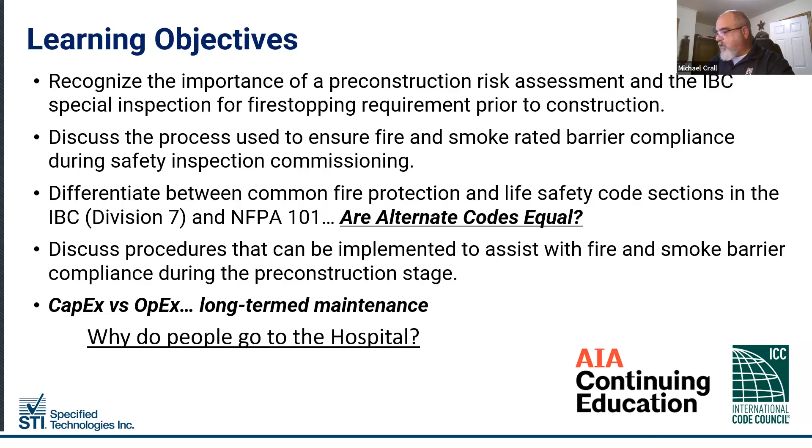So I always start off my presentation with this video. It's a quick video. Here we'll see a staged fire. What I'll ask is please pay attention to the right arm of the chair, the seat cushion, and then the lampshade. So we'll notice it's a dried Christmas tree, to be fair. Watch as that tree is engulfed in flames.

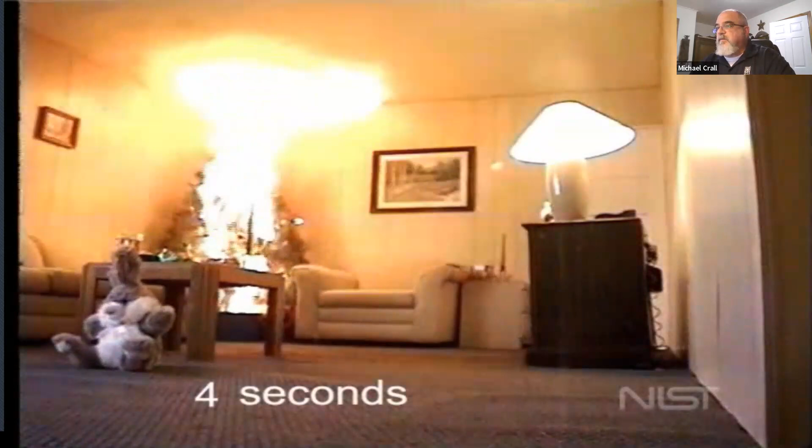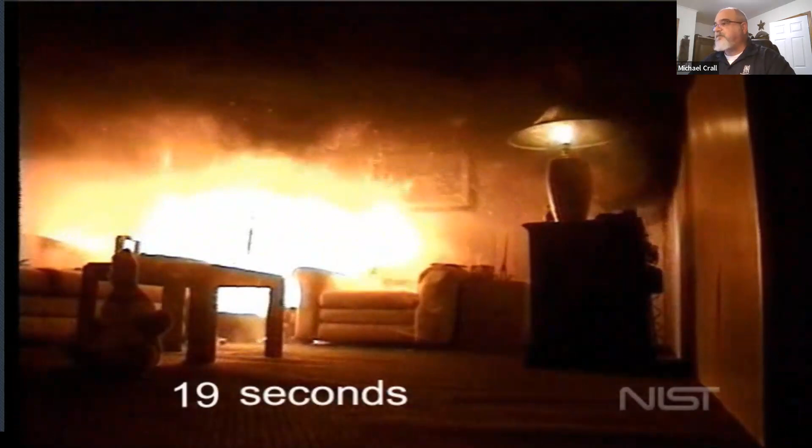We'll start to see the thermal properties broadcast within the room. Notice that right arm of the chair is starting to smoke. We call that off-gassing. Watch as that right arm ignites and then the seat cushion momentarily after. Note the color of the smoke. Now, looking at the lampshade, why is that lampshade melting? So we see the convection within the room.

If maybe when you were a child, you were told to be at the floor line in a fire event, we used to have 17, maybe 18 minutes to vacate our own home in a fire event. Those statistics were updated to 3 to 4 minutes. I attended the NFPA conference earlier this year. That 3 to 4 minutes has now been reduced to 2 minutes. So we're going to come back to that.

So smoke can travel upwards of 420 feet per minute, given the fire load or the fire conditions, if you will. And approximately 57% of people who perish in a fire are not in the room of the fire's origin. So again, most people perish in a fire due to smoke.

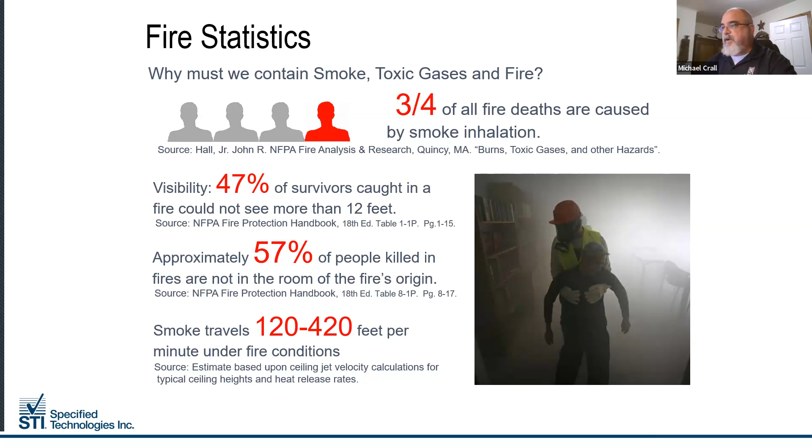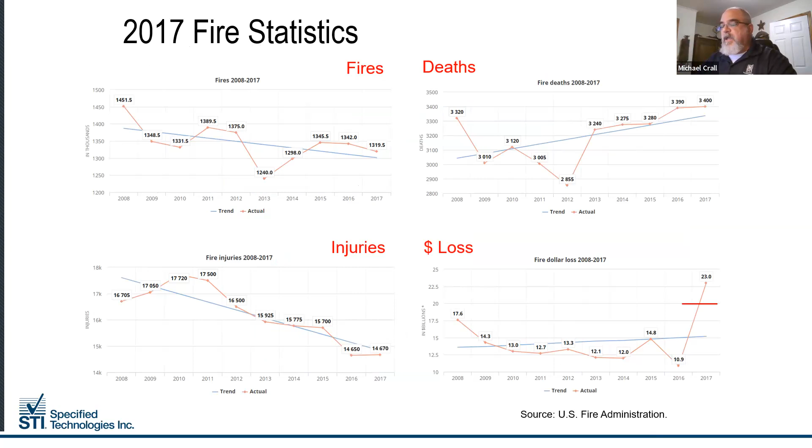Fast forward about 10 years, we see a decline in fire events and a decline in injuries. However, we have an uptick in fatalities and property loss. That red line in the property loss, anything north of that is wildfire. So I pulled that data out. So remember these statistics in that video we just watched as we go through the presentation and we talk about the 2 minutes that we have today.

If we take a step back into time and we look at the early years, if you will, what we'll call the definition years, Firestop was previously listed as a product listing. So think of it as a silo versus what we have today being system listings. So we have an incorporation of a lot more standards that we have.

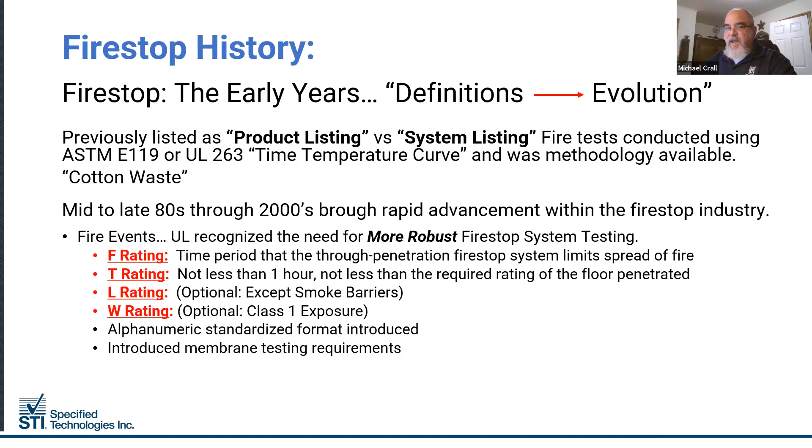Mid to late 80s through 2000s brought rapid advancement within the Firestop industry. UL recognized the need for more robust Firestop system testing. So we see the development of the different construction materials. You see the 4 different ratings there that we're going to come back to. These are part of the ratings that we have in our industry, as well as specific standards of how those assemblies will be tested.

So now we enter into the evolution years. So the mid to late 80s and early 90s, we continue that rapid advancement within the Firestop industry. We see the incorporation of collars, so we have combustible pipes. We also look at inclusion of accelerated aging requirements, which is noted within UL 1479. We also identified the alphanumeric standardized format, which was introduced in 1992. The L ratings were identified in 1993, which is inclusive to UL 1479.

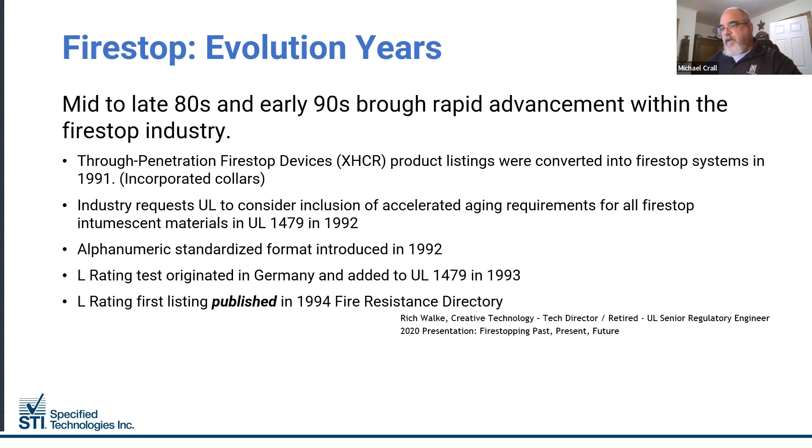First listing published in 1994. W ratings for water. And let me go back a second, please. L ratings, leakage, air leakage. So we look at leakage from one side of the, let's say, gypsum wall to the other side, or possibly a floor condition, as L ratings are tested within smoke barriers. Smoke barriers are unique in that they have vertical and horizontal orientation.

The W rating is for water. So we have 3 classes of exposure. If you think of the marine industry, construction falls within class 1, which is a 3-foot high water column that sits around the assembly. So we're not allowing that water to pass through that horizontal condition for upwards of 72 hours. Once that assembly dries, then it goes into the next realm of testing. W rating first listing published in 2005.

You may be aware of the 3 legacy codes. They merged, became the IBC, the ICC as we know today. First publication in 2000.

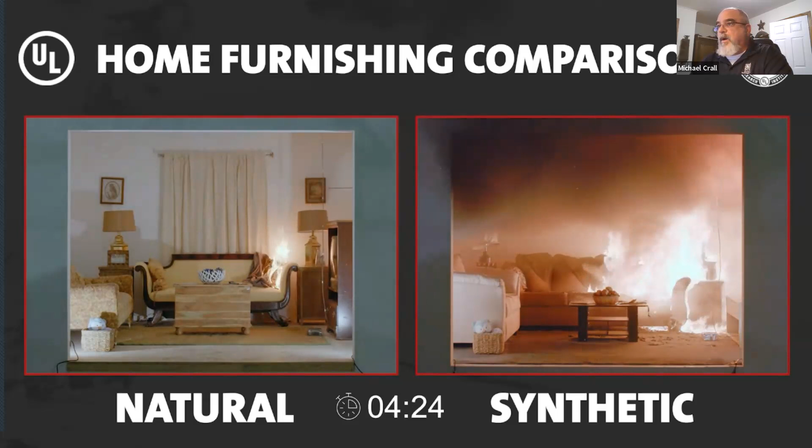So we see how the synthetic fibers in that video on the right, time to flash over less than 5 minutes. So we can see as we incorporate and bring different fibers into our construction and what those furnishings are, how that can actually add to a fire load. Notice the color of the smoke on the natural video side. So when we were told to be at that floor line, these were the conditions at that time when that 17, 18 minutes was recommended or identified.

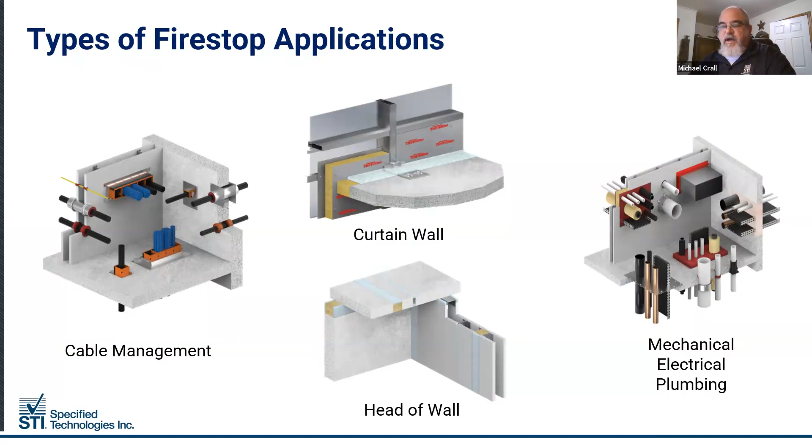So types of Firestop applications. We have different through penetrations, which would encapsulate cable management, mechanical, electrical, plumbing conditions. We also have various different joint conditions. And then edge of slab, curtain wall, but they all fall within the perimeter containment family.

We can find overfilled sleeve conditions. The reason there's no tested system is because there needs to be enough annular space or void within that sleeve to allow for the fire stop material. We call that percent fill. Where we have too many cables, now we're not allowing for that addition of the fire stop that's required.

So typically we'll be in a 30 to 40% maximum percent fill. Some assemblies may allow 100%, but we're getting into devices that are completely designed devices that have intumescent incorporated into that device.

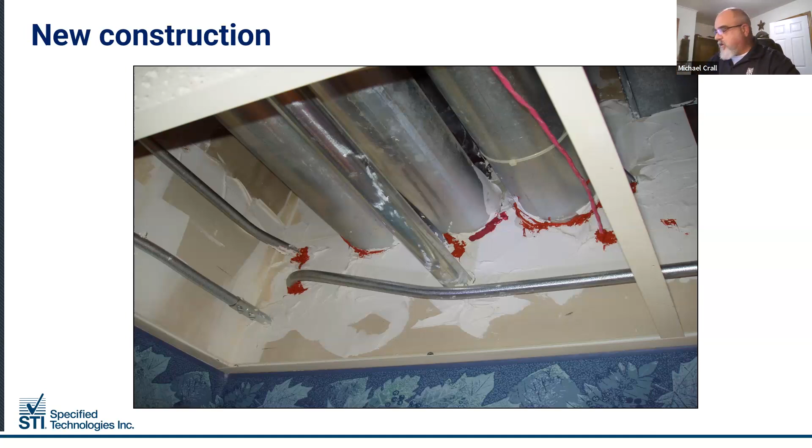So this is a picture of new construction. Again, going back to the CapEx versus OpEx, good people, but we think by just using drywall, tape, and mud, we're having a drywall repair and it's compliant and installing Firestop around it, but there is no base design that will allow for the addition of the tape and mud as we see in this particular photograph. So drywall mud is not Firestop.

Drywall, tape, and mud is very good for your butt seam joints, where the gypsum board assemblies come together. That's part of that tested assembly, but not using that mud and compound within the annular space, so that gap around that penetrating item. That will not pass not only the fire duration burn, but then also the hose stream test, which we have that video coming up.

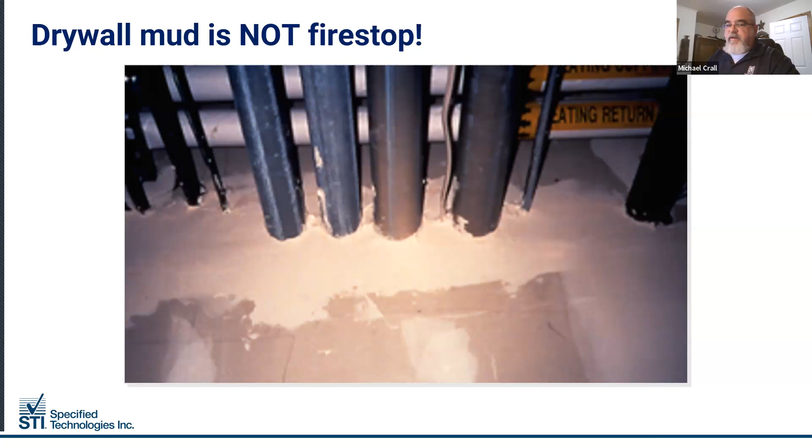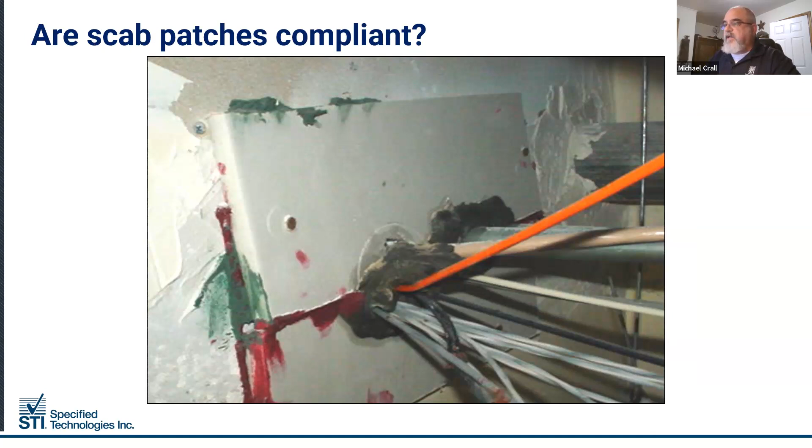Scab patches are not compliant. So we're taking drywall, putting it on a wall, and a couple random screws or maybe nails, and thinking we're using maybe the right materials, so we think we're compliant.

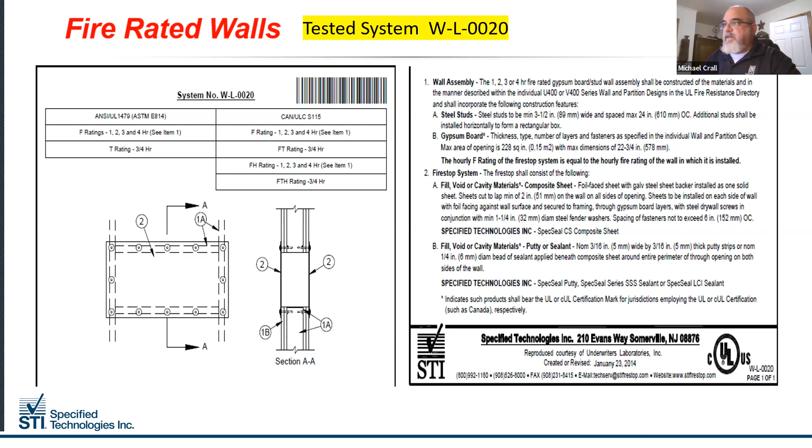In this case, WL0020, we're taking a gypsum wall, and what we're using is a composite sheet. Notice 1A in the illustration on the left, you have your vertical studs, and then you see the horizontal studs, which are also added. That's adding integrity to that system. You see the drywall screws and the fender washers. That's providing a better integrity for that composite sheet as it's secured to the wall. This is a tested system.

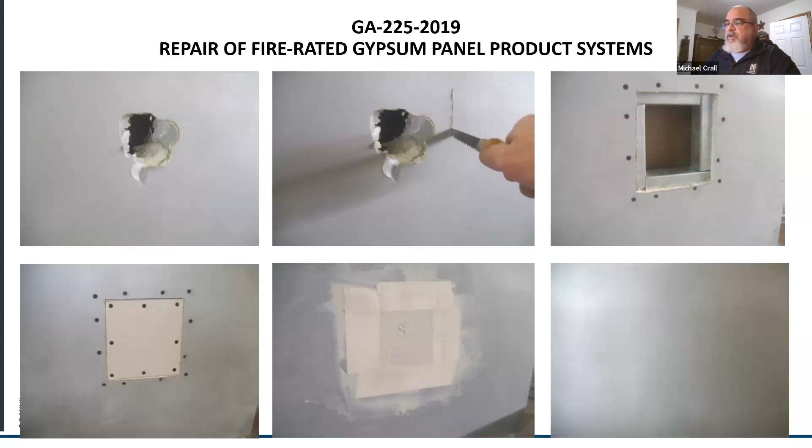Industry repair alternatives, we get into what we call the GA225, where we have a damaged drywall section in this instance. We cut that damaged area out. We add that framing. Notice the screws and the screw spacing, and then drywall tape and mud. There's no Firestop. This is not a tested system, but the intent is we're going back to the base design.

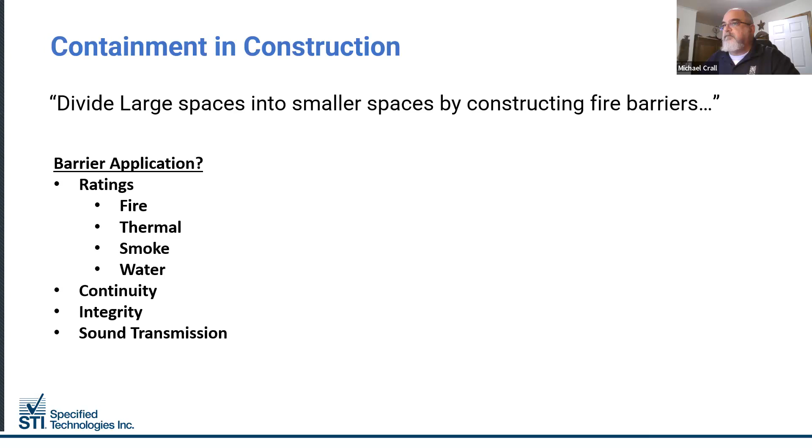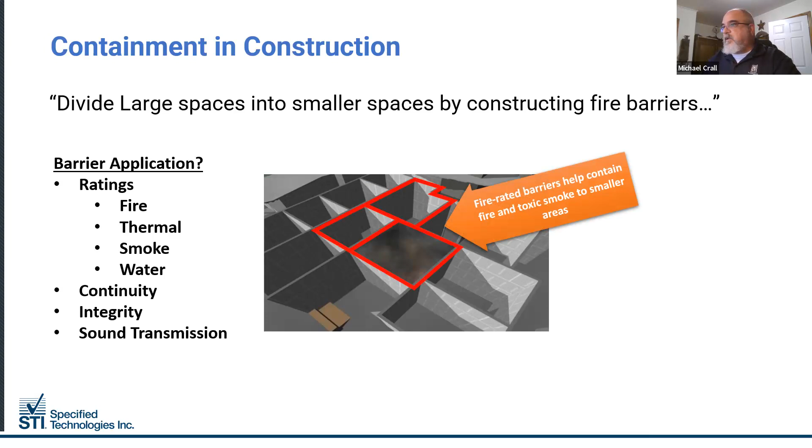So we look at the different codes and the alternative codes. And it's important to understand how they're identified. NFPA 101, for example, does not identify firewall because it's life safety oriented, not construction; IBC is where we would find the firewall. So you see a couple stars here. So my fire resistance rating of that barrier and then the door assembly.

If you've ever questioned why we may have a 1-hour fire resistance rated wall and a 45-minute door, that's because there's not intended to be a direct fire load in front of the door. So that's why we'll have 45 minutes, whereas the upper star, we may have a cabinet or a couch or some sort of furnishing that would be in direct contact or close to that wall that could potentially flash.

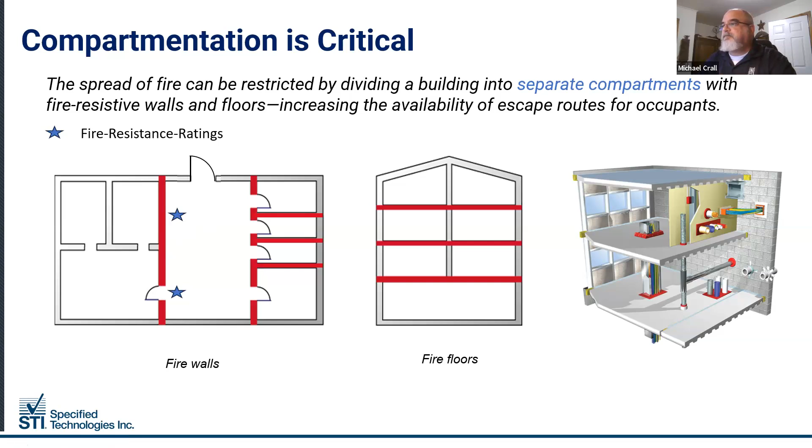Comparing the life safety and construction documents: on the left-hand side, viewing through IBC, on the right-hand side, NFPA 101. Labeling, where we're actually labeling the firestop applications, is not a code requirement. It's identified within FM 4991 as a best practice.

Whereas marking and identification, or what the industry will call stenciling, was first introduced in IBC in 2009, maintaining a 30-foot spacing. 2012 was updated to maintain that 30-foot spacing, but within 15 feet of an end cap or that termination. So I don't have to rip up 30 feet of tile to find my first stenciling point. NFPA 101 also does not recognize marking and identification.

So I've been in the construction industry for 30 years. I worked for 2 different manufacturers, firestop manufacturers. In between that time, I did code consultant surveys and inspections, and a lot of them in healthcare facilities.

So it's very important to note when we look at the construction documents in accordance with IBC versus the NFPA 101, which are life safety oriented, but we still have to maintain those barriers, the doors, whatever those assemblies are within the building code, we cannot downgrade them.

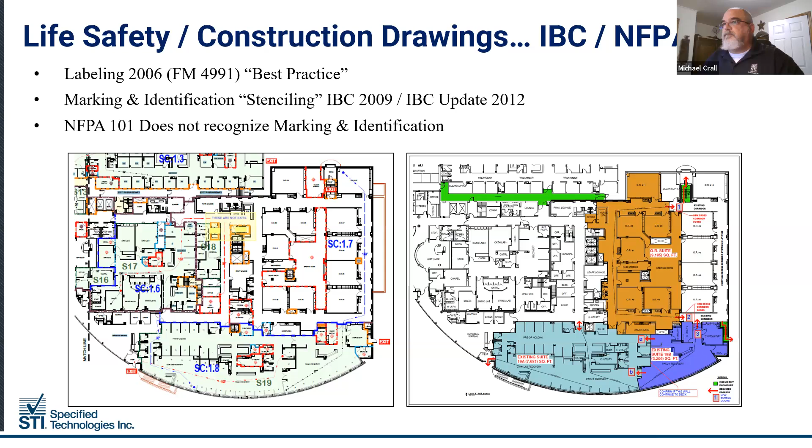So what to consider in the design? So again, we have the three different sections: through penetration, joints, and then perimeter fire stopping, as well as additional divisions where we're going to specifically call out those fire stop applications with reference to industry standards and testing.

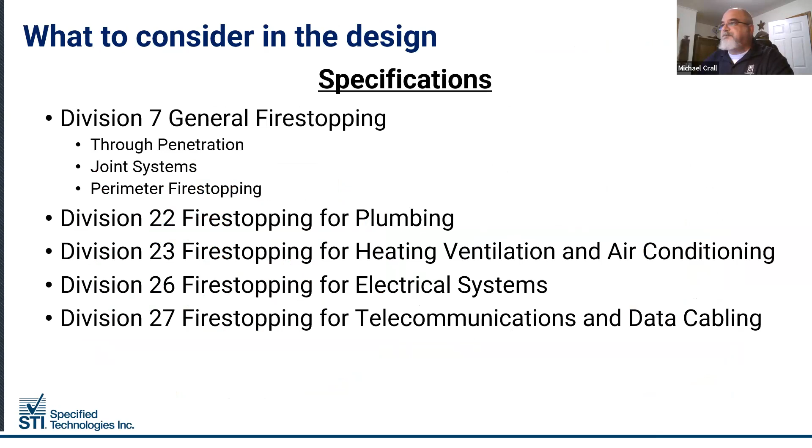Where requested, there's also the ability to include CAD detail sheets. If we're able to obtain a blank title block sheet, then we can compile the tested systems, or submittal, if you will, for that project, and then incorporate the CAD detail sheets as part of a barrier management program. You're starting to outline what those conditions are, how the barriers are identified, and then where the fire stop applications are noted.

So we talked about different penetrations. So through penetrations go completely through, say, a gypsum wall. Where we have membrane penetrations, we're only going through one side. So think of outlets, switches, maybe thermostat housings. And then we have high traffic openings for cables, and how we have to identify each one of those conditions and tested assemblies to reinstate that integrity.

Various different construction joints: head of wall, wall to wall, floor to floor. Bottom of wall is not identified directly in the body and language of the code, but there are STC requirements. We also know that we have the continuity as that barrier is identified within that code, where that barrier shall start at the floor, not a half of an inch up.

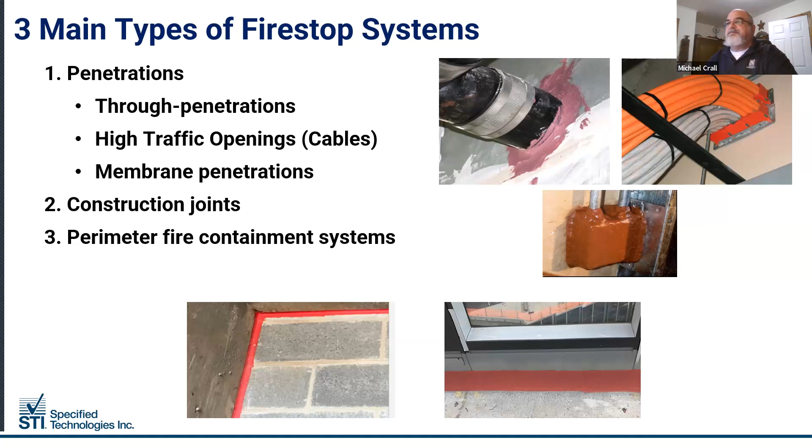If we compare smoke barriers to smoke partitions, smoke barriers, it's a scientific test. We're testing the L ratings. It's a two-stage test. So we're resisting movement of smoke. Smoke barriers are minimum 1 hour fire resistance rated, and again, can be vertical or horizontal in nature. Smoke partitions, however, are non-fire resistance rated, where we're limiting movement of smoke with an approved material.

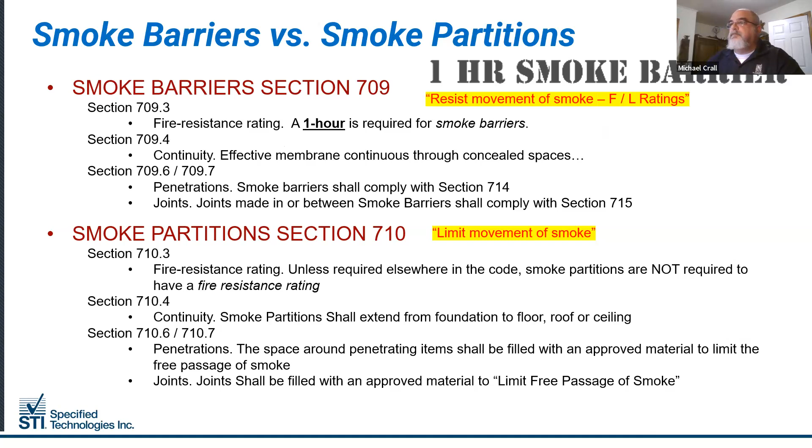If we compare smoke barriers within IBC and NFPA 101, we notice the consistency of the 1 hour fire resistance rating and movement of smoke. However, when we look at existing healthcare, we see Chapter 19. Any required smoke barrier shall be constructed in accordance with Section 8.5 and shall have a minimum half hour fire resistance rating. So why half of an hour versus an hour?

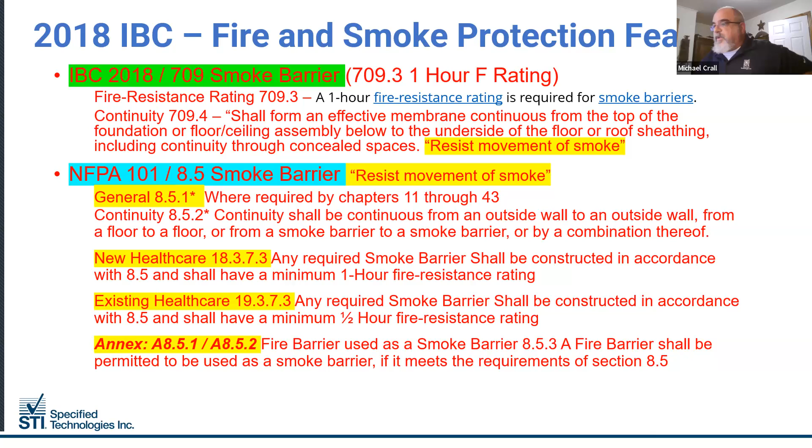We get into Annex A, archaic materials. We can visually see that wall. We can reach out and touch it, but we don't know the products that may have been used to construct that. They may not have met the standards and testing of today, which is the reason for the half-hour allowance.

Third-party tested systems must match the field condition. So the base design, required ratings, that hole size, annular space, penetrant type, fire stop material, etc. According to the analogy, it's like following a recipe. If I'm going to make chocolate chip cookies and I leave out maybe 1 or 2 ingredients, or I add extra, I could possibly alter those, and maybe they might not be any good.

Our industry also thinks red is right, but fire stop can be any color, depending on how it's maybe custom batch ordered. The industry typically relates to and identifies fire stop as red, but it does not need to be red.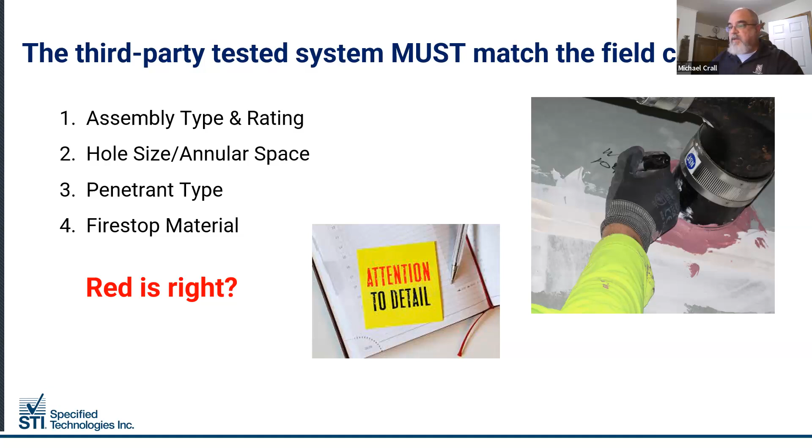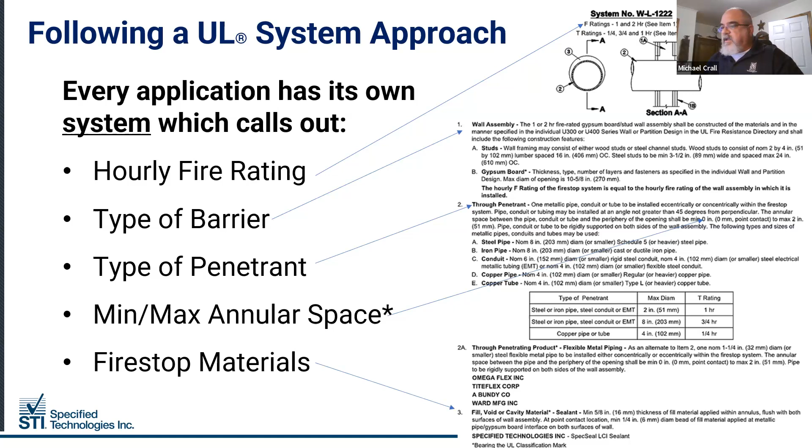So looking at a tested system here, there are outlines for the installer, set of build instructions, evidence of compliance. We're noting the hourly fire resistance rating, in this case, the type of barrier, type of penetrant, and we'll notice there's an allowance of different pipe types. Schedule would also be included, the minimum and maximum annular space, and then the Firestop materials, which were part of that tested assembly.

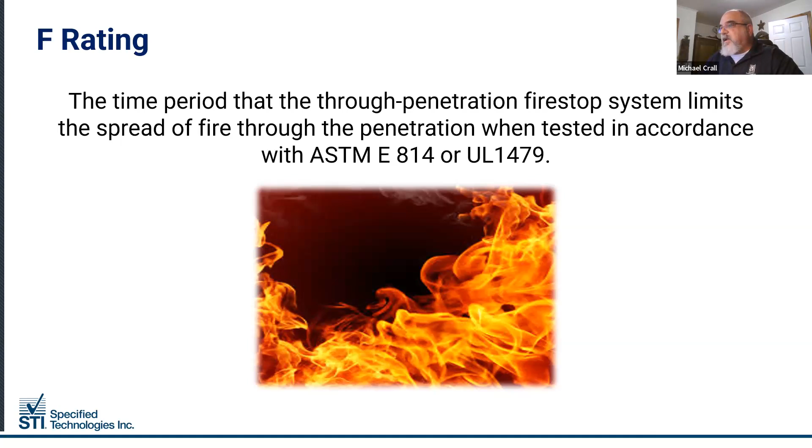The F rating is identified as the time period that the through penetration Firestop system limits the spread of fire through the penetration. So the barrier is not tested to failure. If it's a 60-minute or 1 hour tested requirement, it's tested to 1 hour, not to 1 hour and 10 or to failure. These are notable within standards ASTM E814 or UL 1479.

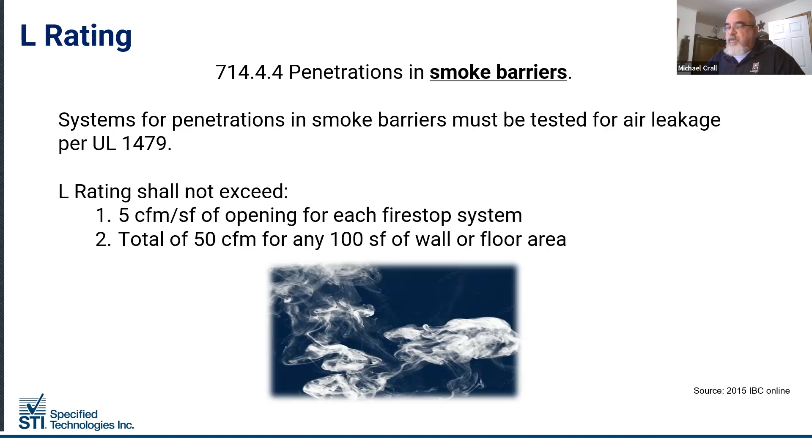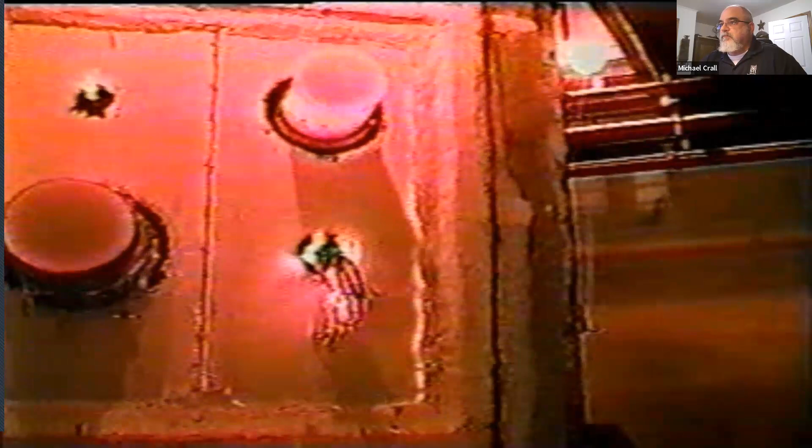Once the wall comes around here, what you'll see is a couple of steel pipes. Basically our temperature is about 1800 degrees on these pipes. We had a plastic pipe in the upper left hand corner, and then closing in here on the cable bundle. This is the application of the hose stream, and as I mentioned, this isn't your typical garden hose. And you can see the first layer, or the one side of the gypsum, is completely blown off by the hose.

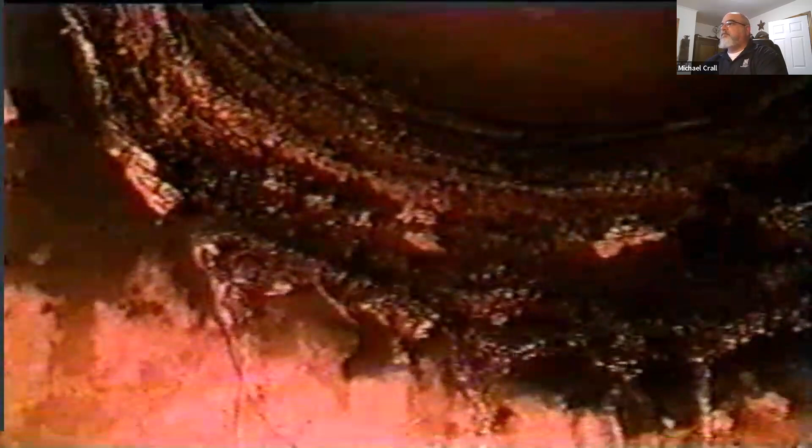This particular hose stream is at 30 psi, but you can see that the Firestop system within this particular sleeve is still intact on the fire side. And getting a close-up of the actual application, there the Firestop system is still intact. This system passed.

So again, that video that we just watched, we're looking at the integrity, not only of that base design, but that Firestop application, in this case, as a through penetration. Where we have that hot patch or scab patch, remember, if that were on the fire side, we would literally blow that patch right off the wall.

Engineering judgments are not tested systems. They're recommendations from the Firestop manufacturer, where we have field conditions that may deviate from tested systems. Therefore, a specific location on a specific project. Quite often engineering judgments in the industry will be used for an entire project, but really they're intended to be for that one specific condition. The authority having jurisdiction can approve or deny that EJ, may have questions. So ultimately that AHJ has that final say.

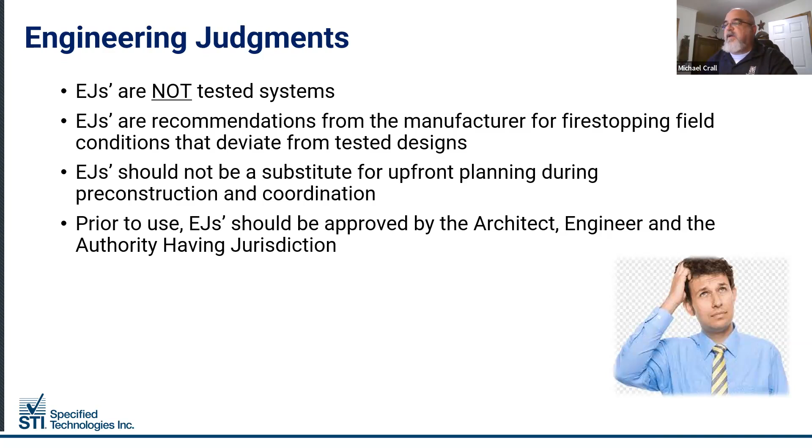Barrier management programs. So we look at the installations and understanding again the role of the barriers, that compartmentalization, how the barriers are comprised, and following a UL system approach as we reinstate that integrity. Quite often people will ask, how can I apply a Firestop or a spray to a wall to give it a rating? Well, you can't. The wall should be identified per that base design as we talked about.

And then when we have a through penetration or a joint, we're reinstating that barrier in accordance with those tested systems and that base design. And then how is that barrier identified in the alternative codes? Where shall it terminate? Can it terminate to the bottom of a floor or deck above, or possibly fire partition to the lower side of a gypsum floor ceiling assembly?

Support systems, we look at specialized support, technical support, and training is really important. I think in our industry, we do a good job of trying to educate, but sometimes we don't explain the why. The why really speaks to the historical piece of where and why we have some of the codes and the standards that we have today. We also utilize products and cases for very specific applications.

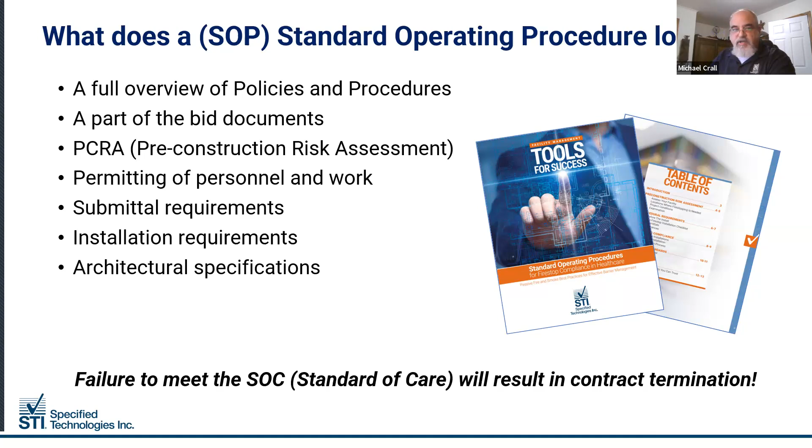So PCRAs, when we look at how they're performed or if they are performed, we want to minimize schedule delays. So hospitals, especially when we're looking into long-term maintenance, we're trying to avoid any surprises during the inspection time. Who has access to a PCRA, who has requested them, and then making sure that those guidelines are being met so that, again, that healthcare owner long-term doesn't have issues when they have an impending inspection coming up. Making sure correct assemblies have been selected and then installed.

It's consistency, communication. Especially Firestop contractors are an important part of this process because they are identified and would be certified within a third party, whether it be UL or FM. So they're actually in a Firestop specialty contractor program where they're audited by UL or FM.

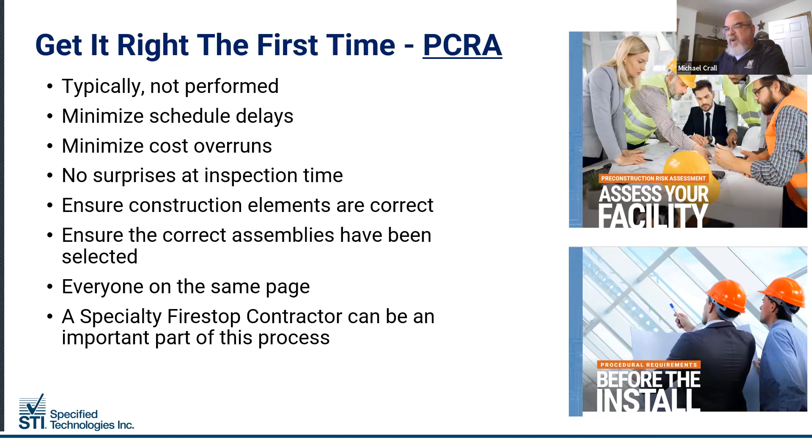I often will ask, why do people go into a hospital? Most of the time, we don't go into a hospital because we want to, or it's an enjoyable experience, unless a family member is having a child. So we're understandably very excited when we have a new baby addition to the family. Most of the time when people go to a hospital, they have an illness or cancer or something going on. So although we have these different permits, what we're doing is we're ultimately having compliance and taking care of those occupants and allowing them to come into the facilities. We have complete compliance over that facility.

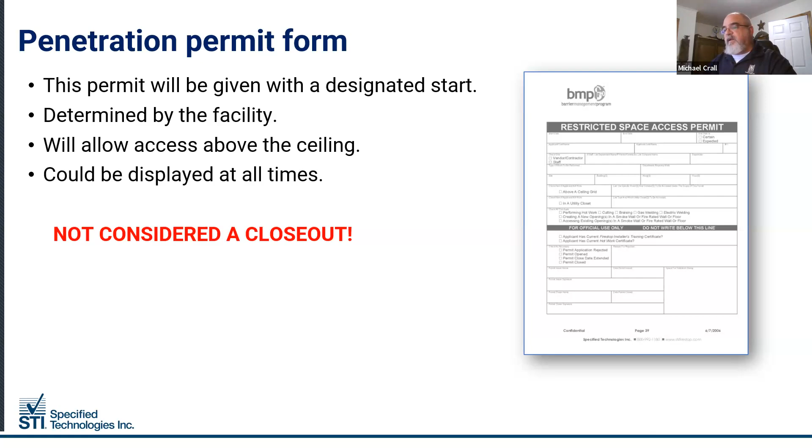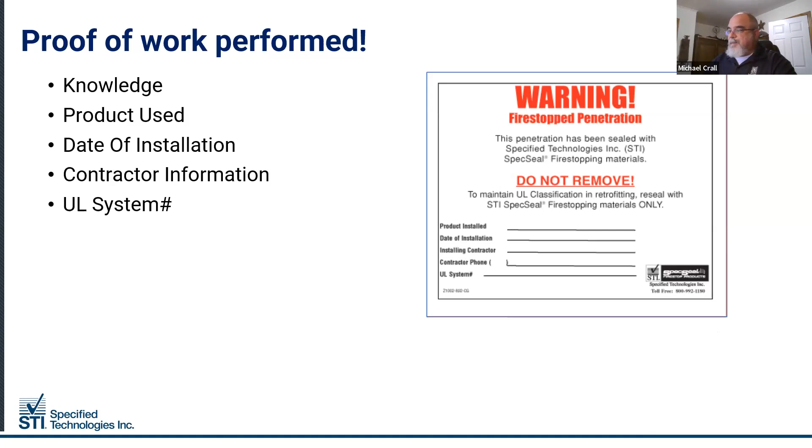Proof of work performed. We're identifying the product installed, the date of installation, that installing contractor, and the identified UL system. Firestop locator program. So what we're doing is using a software. You can upload specific construction documents and literally drop pins depending on where that application is identified and whether it's passed, needs to be repaired, and then that can be toggled into a repaired or needs to be repaired state. The software also provides functionality where the reports can be printed off for a Joint Commission inspection or survey.

Training programs. So first off, let me back up. When Firestop manufacturers go into a job site trailer, we're providing a high-level education-based training. There are also Firestop manufacturers that may offer an accredited training or something affiliated with that Firestop manufacturer. Regardless, these are all education-based. As I've already mentioned, third-party testing laboratories. This is where we can go through UL, FM, and truly have Firestop specialty contractors, which means their books are audited, they're inspected by that third party. It's a lot more involved versus just a training on the street, if you will.

So floor penetrations, I'll have questions where people will ask, if I have to do both sides of a wall, why don't I have to do both sides of a floor? Sometimes we might have to, depending on what that floor condition is. So maybe where we have hollow core, we'll have to do top and bottom planes, so we're not allowing smoke or flames to get up within that void or that hollow and then move horizontally.

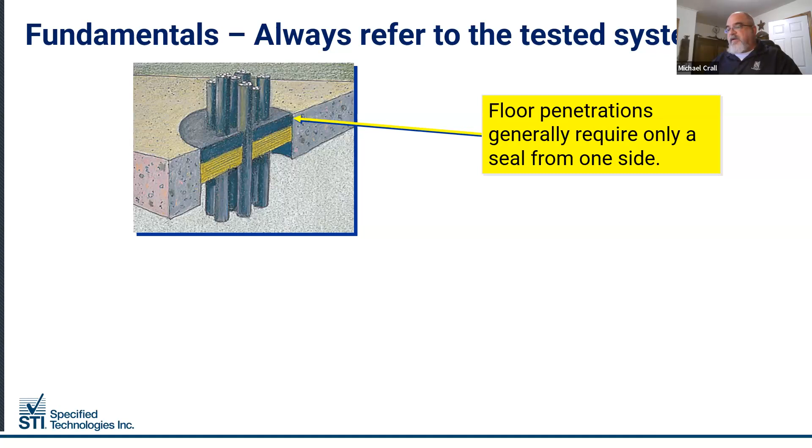We have the condition here with Firestop on the top and mineral wool on the bottom. There are also tested systems that will flip that with the Firestop material on the bottom, because we may only have access to the top or bottom side of that floor. And then wall conditions, again, symmetrical installation. When we look at the base designs, there are some unique design parameters. We just need to be mindful of looking for tested systems that replicate and include that base design that we're looking for.

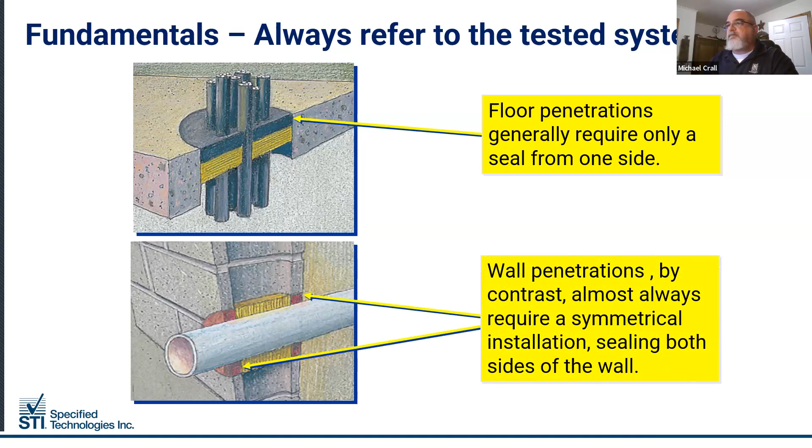I mentioned intumescent earlier. So 4th of July, you got those little grayish black snakes, little graphite discs, hit it with a match, and it makes that snake. So it catches on fire and kind of burns and expands. So when we look at intumescent sealants, that's actually one of the components, I'll say, of that base material.

So those little grayish black flakes that you see in the intumescent sealant, depending on the size of the flake, the chips, and the quantity will dictate part of the expansion parameters, if you will, or intumesce, as we identify for that particular sealant. As the heat is applied, then it will expand just like that snake that we were talking about.

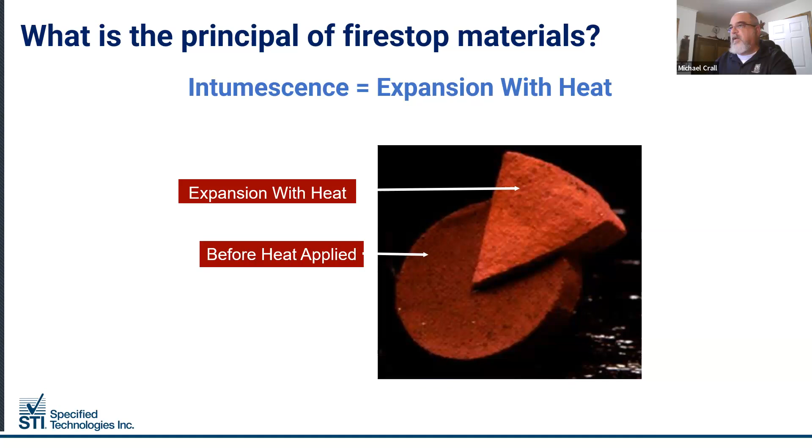The sealants, however, 95% of the time are going to be installed in the plane of the wall versus a collar, which would be installed to the plane. However, sealant is installed within the plane of that wall first, acting as our smoke barrier, if you will, or containing that smoke within that plane of that wall. And then the collar does the heavy lifting should we have a fire event.

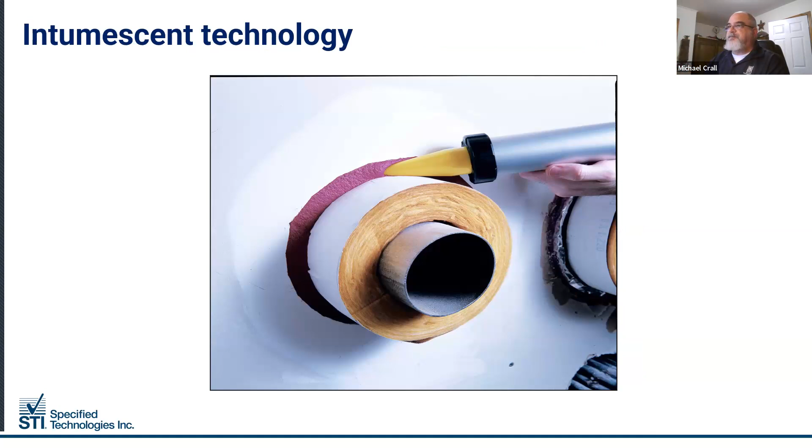So a couple examples here. Combustible pipes, healthcare specific issues, and seeing this is unfortunately true in a lot of healthcare facilities. We have overfilled pathways, a lot of randomly placed cables, limited space sometimes. So especially in healthcare, when we look at cabling, we're identifying those conditions so that we're keeping it contained to as many limited pathways as possible.

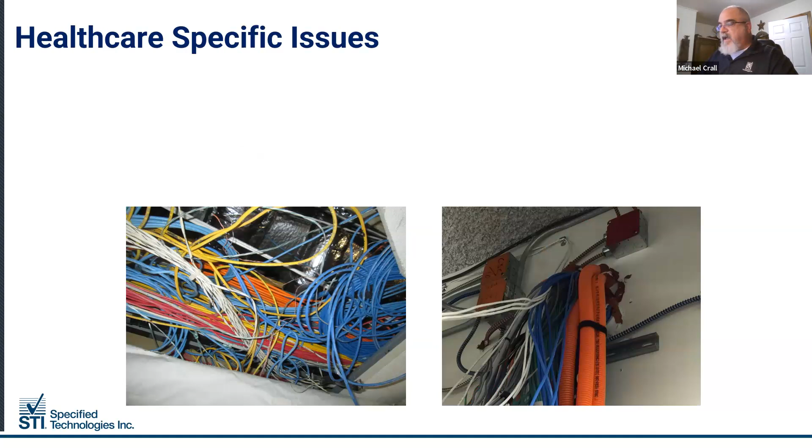Cabling and cable applications. So we look at barrier management, especially over time. It is definitely a significant challenge for the healthcare facilities because now we have overfilled or potential for overfilled pathways. And then also when we decommission cables, pulling those cables back out of that assembly so that we no longer have that added fuel load.

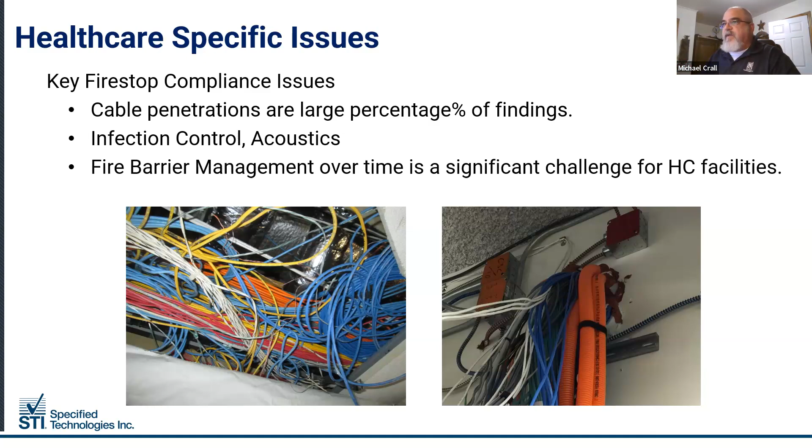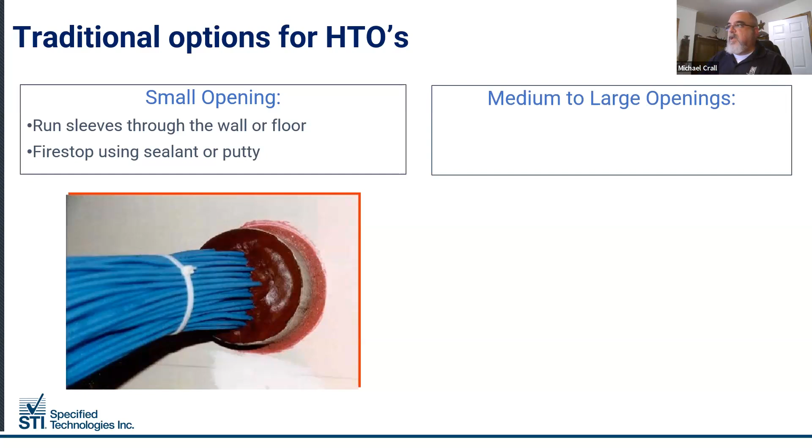So small opening. I'm not a fan of sleeves to begin with, unless we have cable applications. Where we have cable applications, the sleeve helps contain. Ideally, we want to use a device that's designed and has that Firestop intumescent incorporated within that device. So small openings, large openings, in this case, maybe using some pillows or cable tray applications.

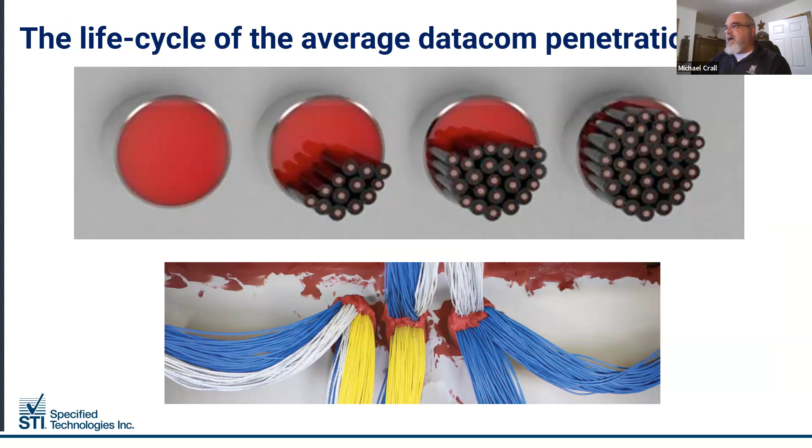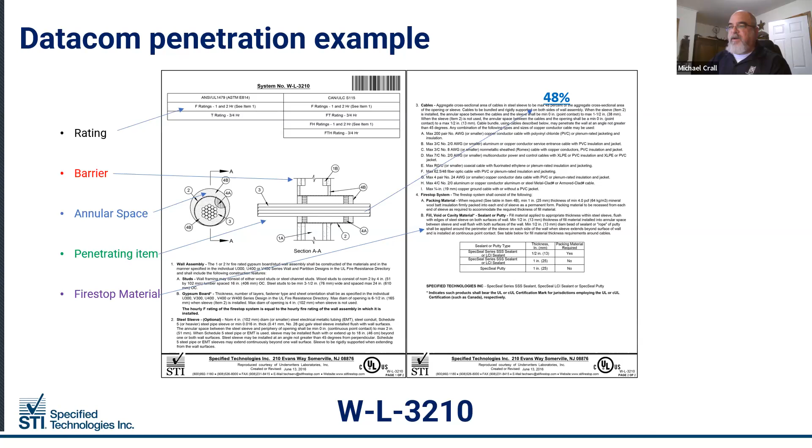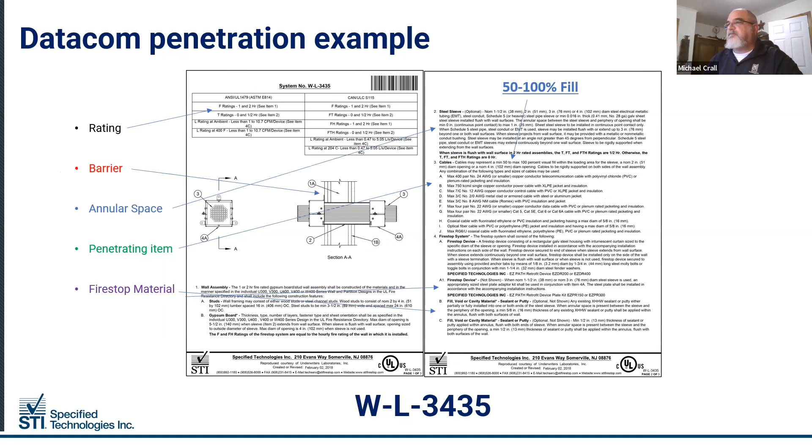Where we have overfilled cable assemblies, there may be an availability to use a retrofit device like we see here. It's like a clamshell that attaches directly to the wall, or could also attach to the end of a sleeve, so that we're maintaining that assembly and we have a compliant installation. Again, a couple other visuals of that.

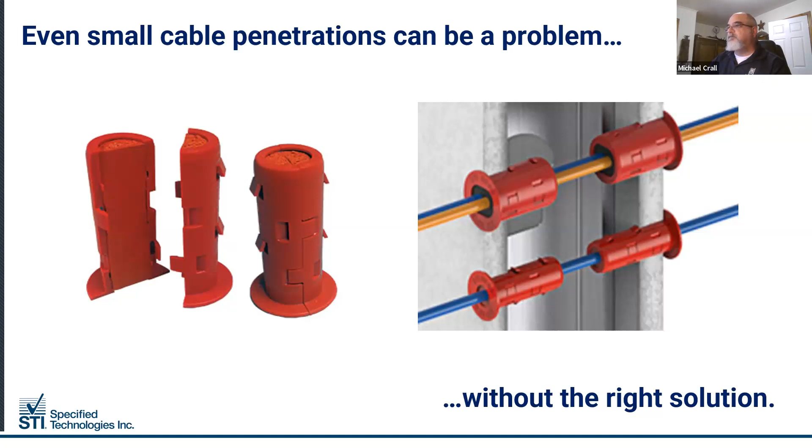Small cable penetrations, these are individual. So instead of large openings, think of your security cameras somewhere that we would have a visible application. Self-contained fire-rated pathways, horizontal, vertical orientation, and then dedicated floor conditions as well. Take the cable tray, we dump those into specific devices.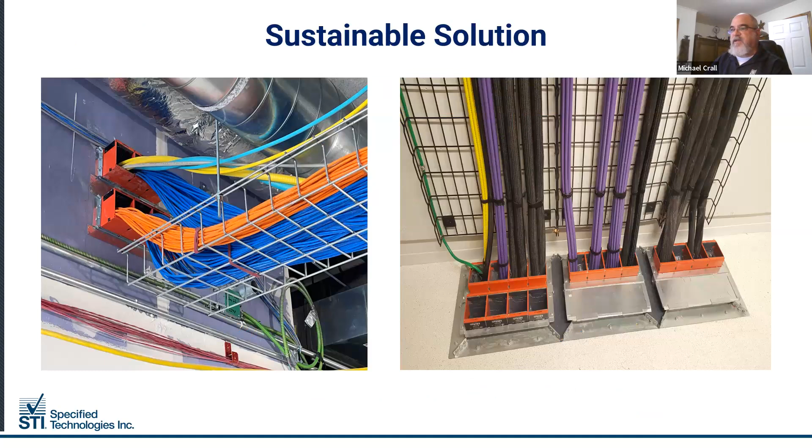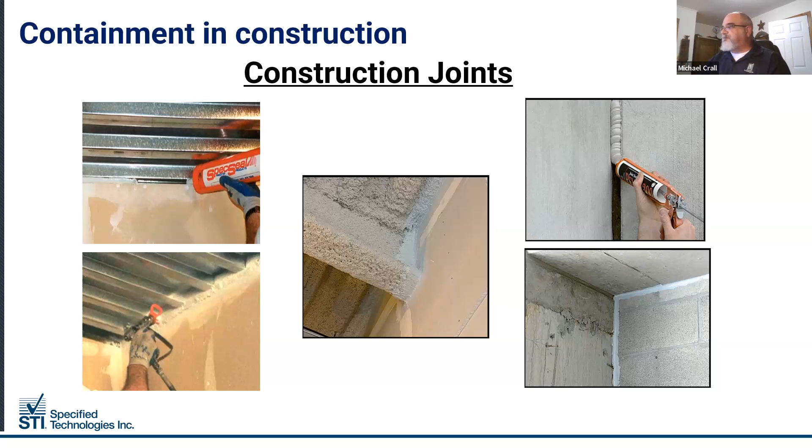Joint conditions, so we have gun grade, meaning we can install that sealant and it has a hangability. And then also self-leveling, so we apply that product in a horizontal condition and that product will self-level. A couple different joint conditions here. Curtain wall joints, floor slabs.

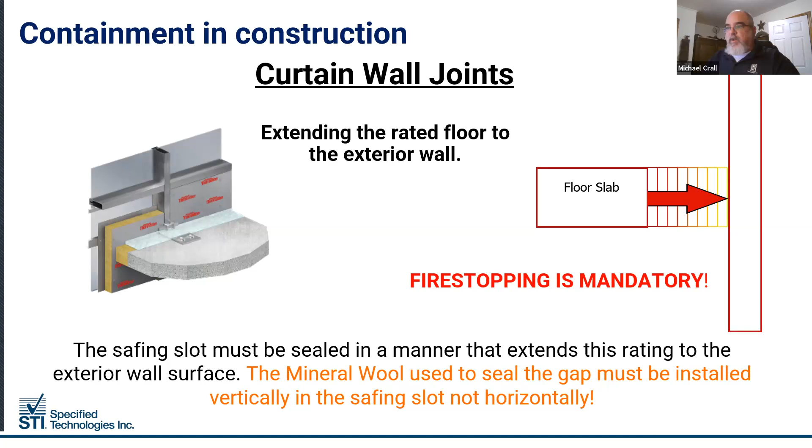So now I'm going to say, think of your continuity. So we're maintaining the continuity of that floor slab rating across that void or the gap out to whatever that external curtain wall assembly may be, whether it be glass or different types of EIFS or brick, whatever that exterior cladding might be.

So we'll conclude the AIA educational portion here. So we talked about some of the cable pathways. In this case, the EZ Path. It can be installed with 0 cables to 100% fill. So as long as we can fit another cable through the assembly, then it's tested for that condition. You see different horizontal, we have vertical assemblies, some using composite sheet, and then the floor conditions that we see identified as well.

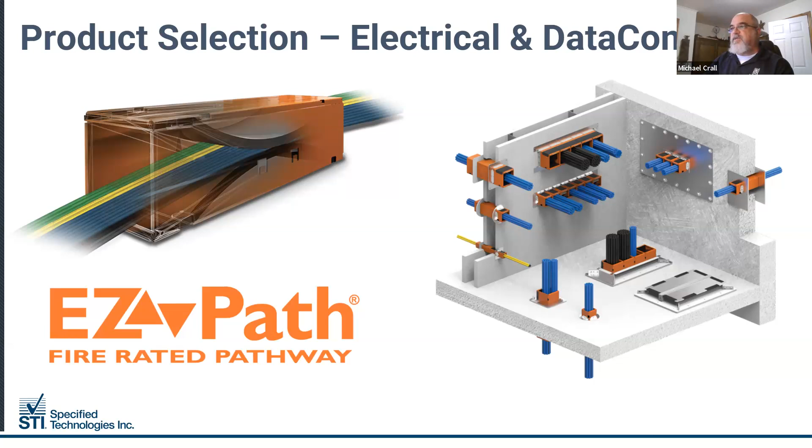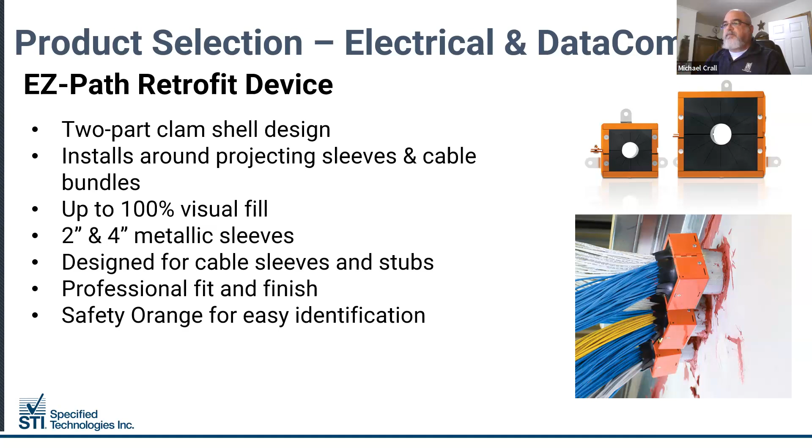A couple other examples, what that looks like on the fire side and non-fire side. This is the retrofit device that I mentioned. It's actually personally my favorite product. All the years in the industry, this is truly, I call it compliance in a box. And as you see here, it can be mounted directly to a wall or extending to the end of a sleeve. So open it up like a clamshell, clamp it down, and tighten that screw.

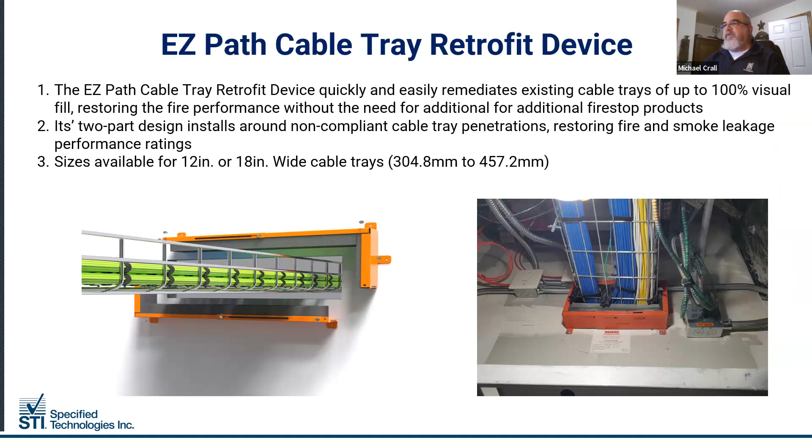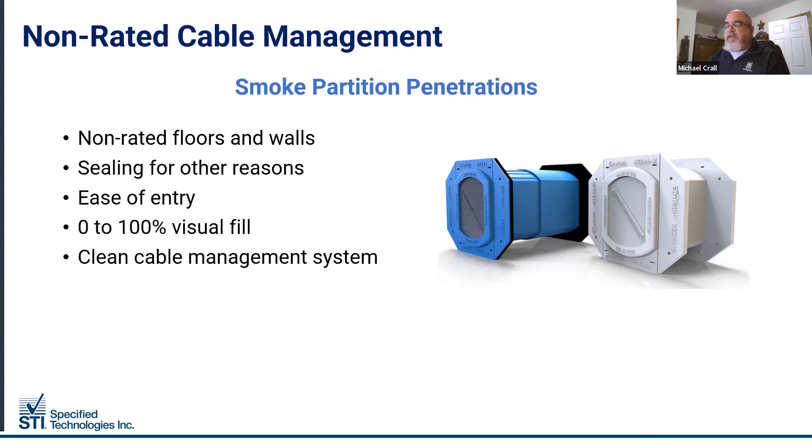Cable tray retrofit device. It's unique to wire cable trays as what we see here. So it's very specific to that condition, but a wonderful product as well for retrofit applications. Non-rated smoke partition assemblies. So here we have what we call the NES. So it's a non-rated EZ Path. Very easy for entry, 0 to 100% visual fill. Excellent product, again, as part of a cable management system.

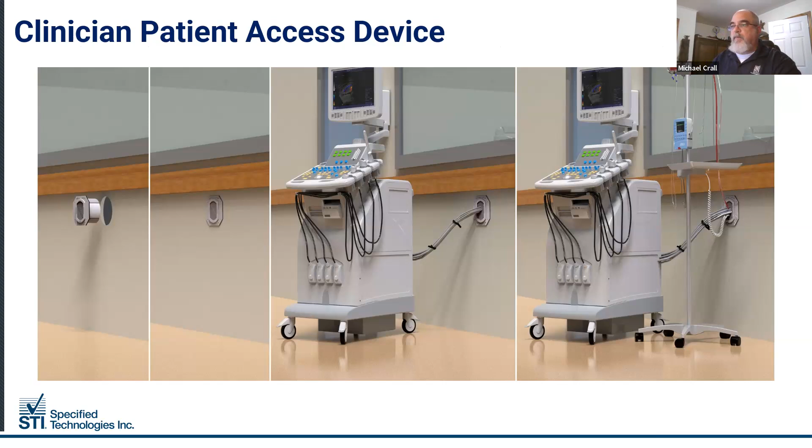So during the COVID years and different pandemic issues that we had, IVs and tubes, different sensors, wires had been run under floors. So STI designed a clinician patient access device. It's 30-minute rated for our corridor conditions. So instead of running these cables underneath the floor or literally sometimes over the top of the wall, install this device in the wall condition, run the cables and leads through. The staff still has access, but maybe not having to don PPE to go into the room. All the monitoring, where possible, can be done from the corridor.

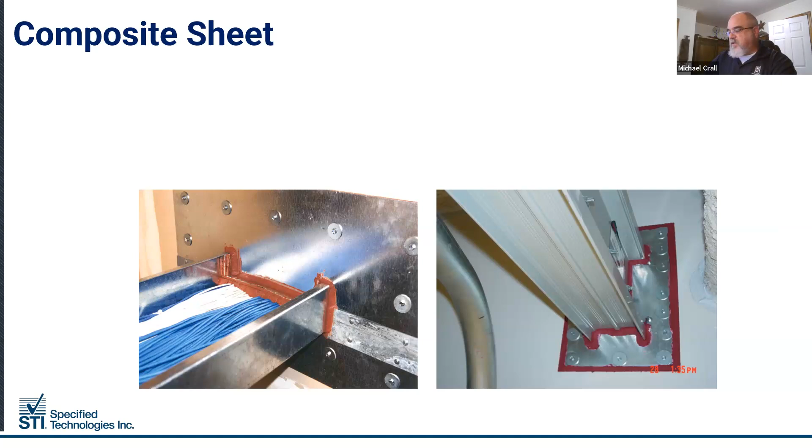Composite sheet, so it's a sandwich layer, if you think of it that way. Sheet metal one side, foil face on the other, with a layer of intumescent in the middle. So we install this in cases where we have maybe a damaged wall section or possibly multiple cable trays, allowing for future use. Wonderful, wonderful product.

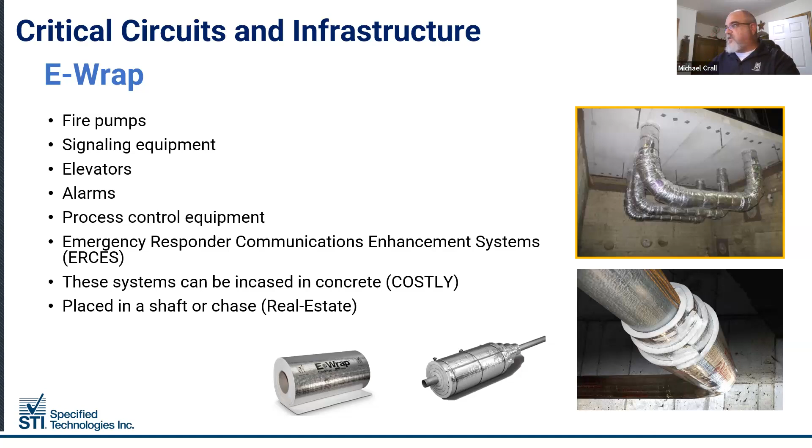E-wrap, endothermic wrap, it's chemically bonded moisture to this particular material that would, in a fire, actually help cool that particular application. So wonderful products where you have dedicated fuel lines or maybe communication signaling equipment. Think of it as a flexible shaft from one fire resistance rated assembly to another. We may have a section that's exposed. It's a wonderful product for that application.

The STI system search and submittal builder. The 30 years that I've been in the industry, not only working for 2 Firestop manufacturers, but when I did the code consultant inspections and surveys, I worked with pretty much every manufacturer.

And I'm not saying this because I work for STI, but we simply have the best system search that is available in the industry. You can select drop-downs; it's very easy to find what you're looking for. We have what we call Access STI. You create a profile, you log in, you have educational content that's available to you.